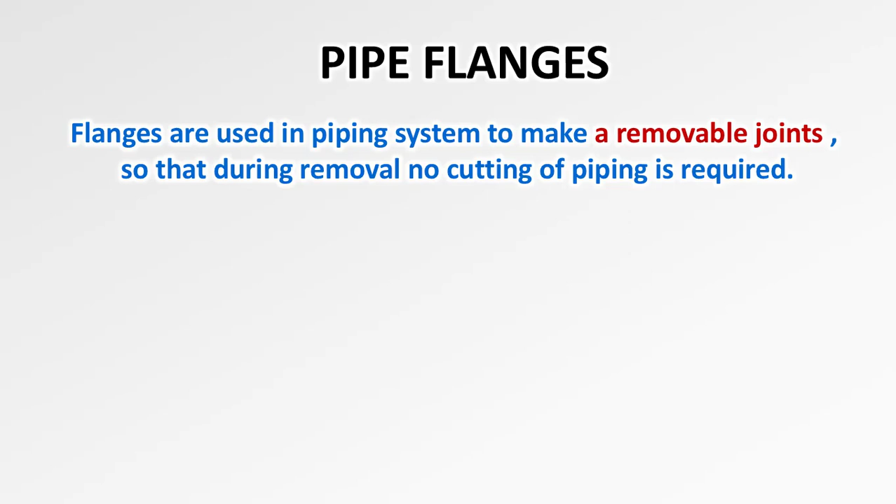Flange joints look like this. When you have a flange joint in a piping system, you do not have to cut the pipe for the sake of removal. But if you don't have a flange connection in a piping system, probably you don't have any option to remove the pipe without cutting. You have to cut the pipe for the removal of the spool.

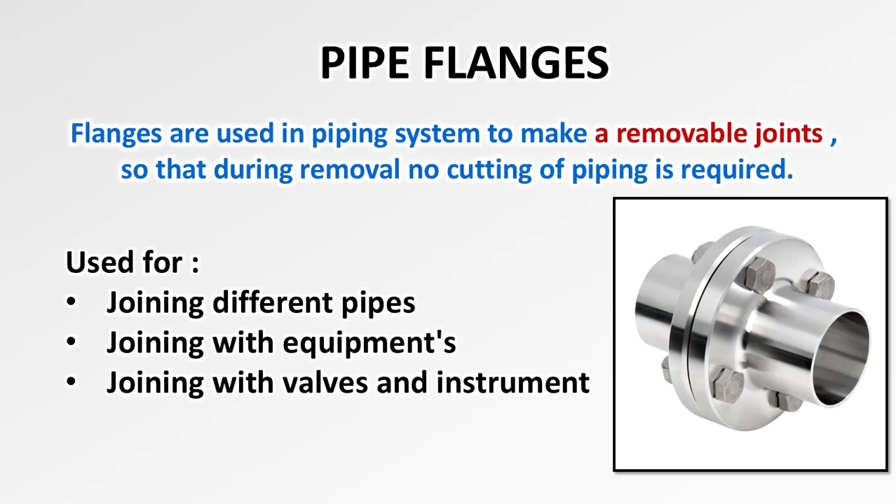Other than this, it is also used for connecting with different pipes and also used for connecting with different equipments, valves and instruments. Flange joints actually have a multi-purpose. It helps the removal of piping system during maintenance, and at the same time it provides an option to connect with different piping inline items without welding.

Now let's see the types of flanges available in the industries. Basically, flanges are classified into two major categories: the first category is the type of attachment with the piping, and the second category is the type of facing. Let's see both of these categories in detail.

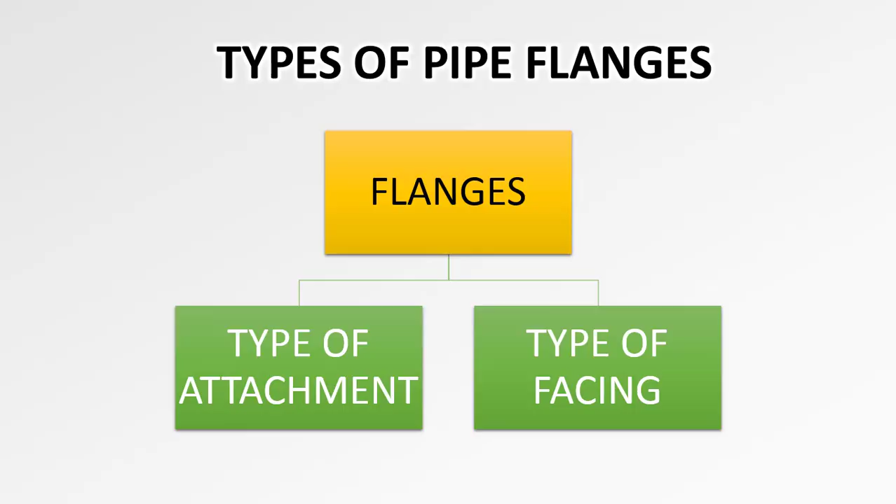So the first one is the type of attachment. It is nothing but the attachment by which flanges join with the pipes or pipe fittings.

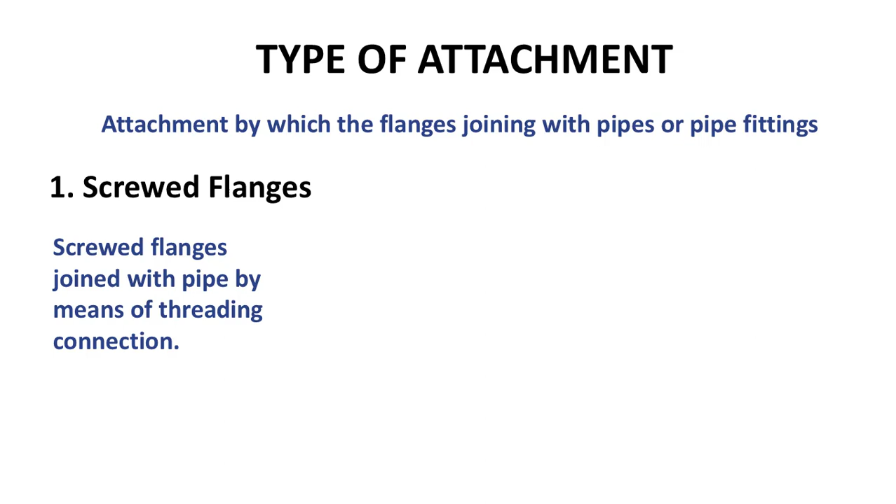So the first type of flanges is screwed flanges. From the name you will be able to understand that screwed flanges join with the pipe by means of a threading connection. This is how it looks. The flange has a female thread end and the pipe will have a male thread end, and both fit together.

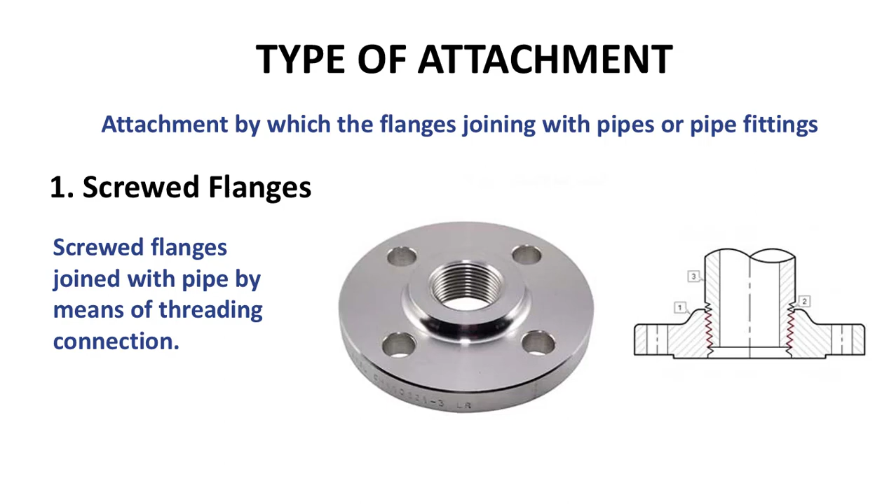The second type of flanges is slip-on flanges. This is how it looks. The name indicates that the pipe slips into the hole of the flange. You can see how the pipes are inserted into the hole of the flanges, and the blue color shade indicates the weld joints.

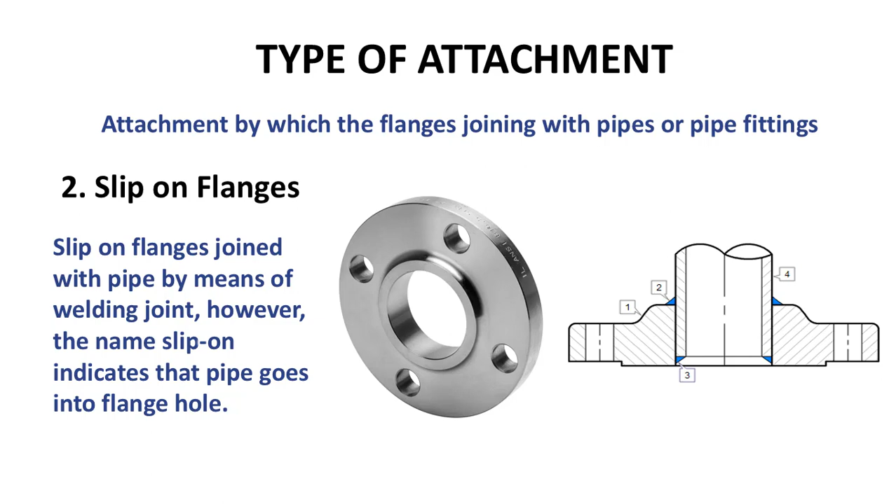This is how the pipes and flanges are welded in slip-on flanges. So slip-on flange is another flange type which connects with the piping by means of a welding joint. The only difference between the screwed and the slip-on joint is that the screwed has a threaded end connection, whereas in the slip-on joint the pipe goes into the hole.

The next type is the weld neck flange. Weld neck flange is the most widely used flange in the process piping industries. From the name of the flange you will understand that weld neck has an extended neck. This is how it looks.

Basically, weld neck flanges join with the piping by means of a butt weld connection. The blue shaded area is the weld joint — it is the butt weld profile basically. So the extended length of the flange connects with the piping by means of a butt weld. This is what is known as weld neck flanges.

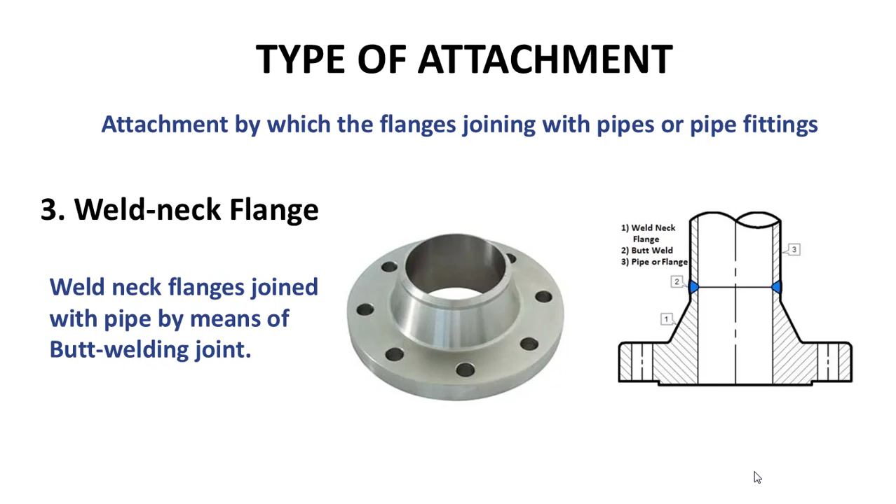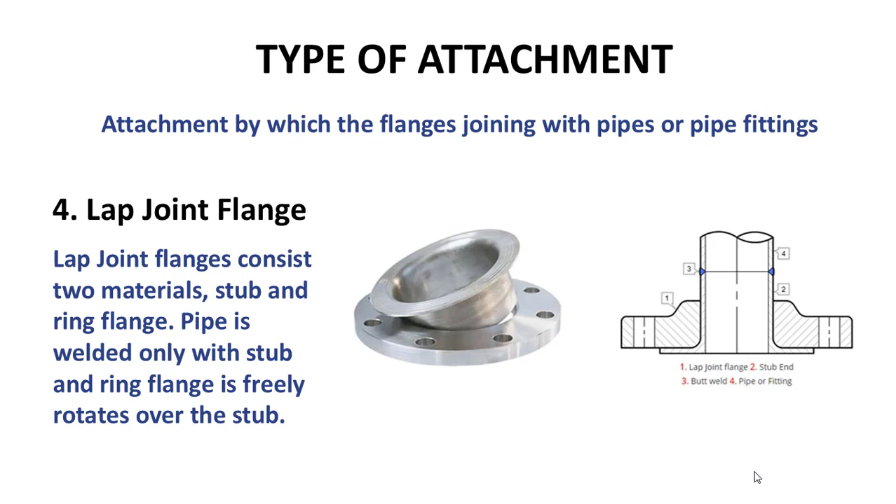The ring flange is an individual part which is actually used only for connecting the mating flanges. This is known as lap joint flanges. And the next category is socket weld flanges.

Socket weld flange, by the name, you will be able to understand that socket weld flanges will have a socket profile where the pipe goes into the flange and gets seated into the socket, and the welding is done at the periphery of the pipe and the flange. In the picture, the welding is shown in orange color. This is how socket weld flanges and pipes are welded.

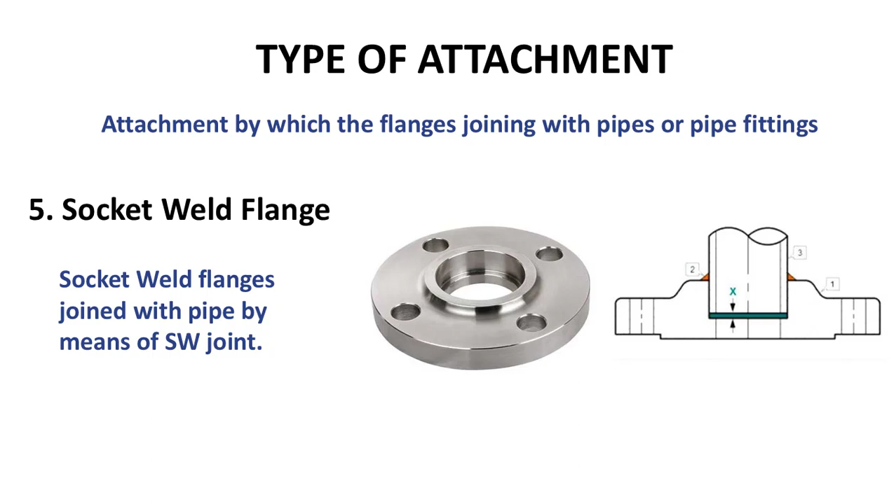These are the major types of flanges based on type of attachment. The next one is the blind flange. Blind flange has no welding connection with the piping; it is basically used to end the line, valves, or continuation of the line. When you have flanges and need to end the flow, you put a blind flange. So a blind flange is an individual part which will not be welded along with the pipes. It is connected only at the flange face, because a blind flange has the same PCD and bolt hole PCD as the flanges, so they can be bolted together.

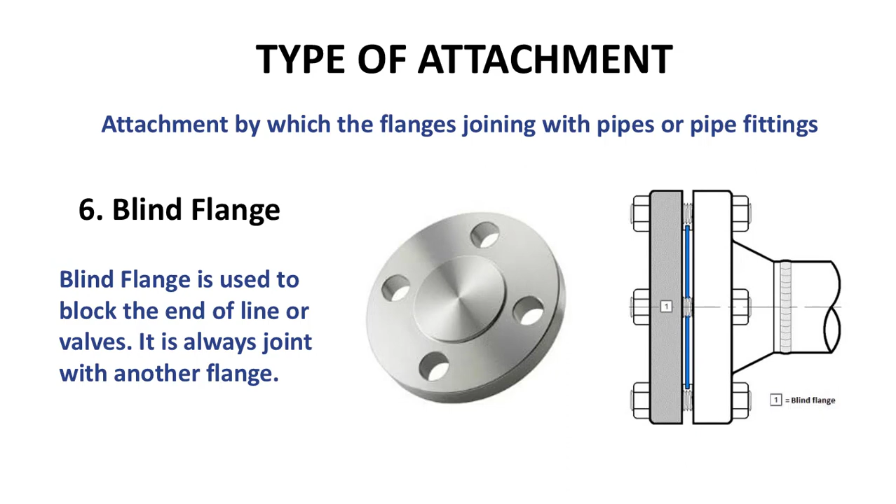These are the 6 different types of flanges in the category of type of attachment. Now we move to the type of facing. The first type here is a raised face flange. Raised face flange has a facing with an extended projection on the flange face, inside the PCD of the bolt holes. That's what I've shown here with a red pointer — you can identify the small projection protruding from the flange face. This is known as raised face, and it is one of the widely used flange types in the process piping industry.

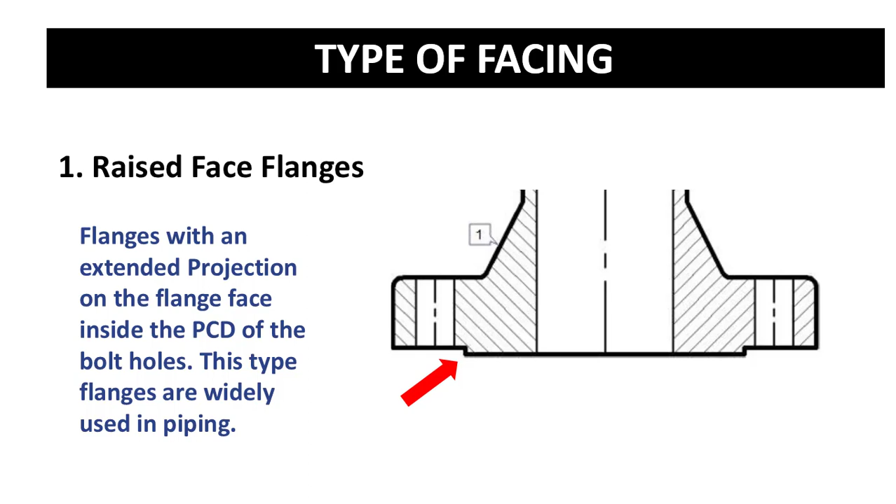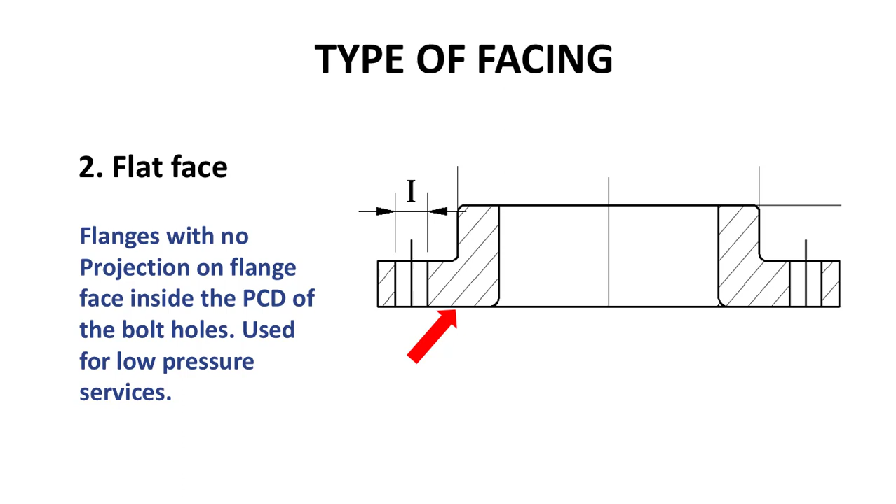The second type is flat face. From the name, you can identify that flat face flanges have no raised face. From the picture, you can see there is no extended projection on the flange face. These types of flanges are known as flat face flanges, and they are basically used for low pressure services.

The third type is tongue and groove. It is actually a pair of flanges, where one flange has a groove and the other has an extruded tongue-like projection, so that the groove and tongue fit together. From the picture, the top flange has a tongue and the bottom flange has a groove, so both flanges connect perfectly without misalignment. This is one of the biggest advantages of the tongue and groove type.

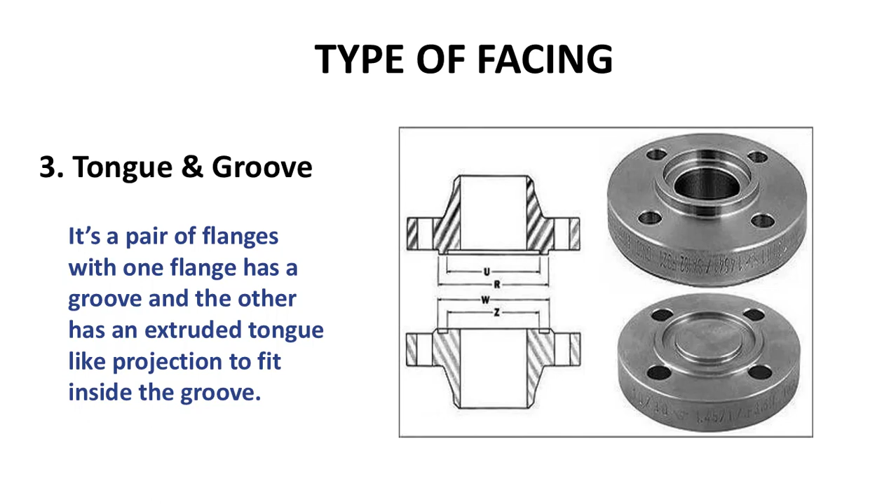That's it for the day. These are the different types of flanges used in the process piping industries. I guess this video will help you understand the different types of flanges used in industries and in piping.